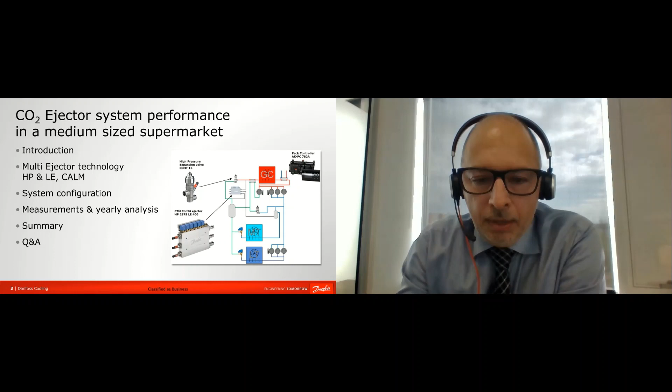Ejector product range, just to get familiar with the expressions we will use. If you look at the top, we have these high pressure lift ejectors with the acronym HP. In the name of these valves, or slash ejectors, there are numbers, and these numbers are actually mass flow in kilograms per hour at certain conditions. You see on the bottom these conditions, and these numbers are actually in the name of the valve. So in that way you can very easily understand for which system size these valves are designed.

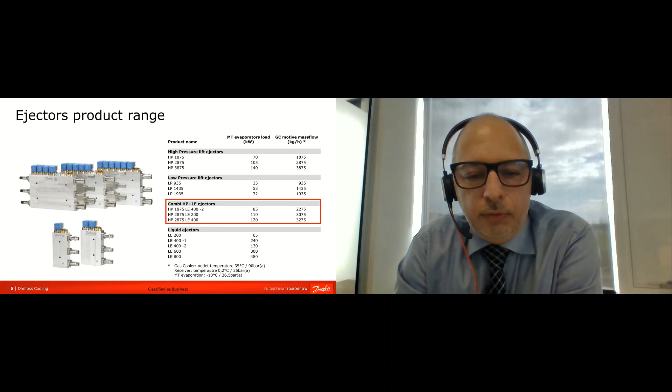Then we have in our portfolio also low pressure lift ejectors. It's also a gas ejector, and it is for another kind of system, which we will not mention later on in this presentation. Then at the bottom we have different kinds of liquid ejectors, different sizes, which are specifically designed to pump liquid. What I marked here in red is this combi, or combination, of HP and liquid ejector. And actually this is today's presentation, focusing on this solution.

What does it mean? If you look at this big block where we put different ejectors inside, different capacities - this one consists of 5 vapor HP ejectors of different capacities, and then at the far right in this picture is the liquid ejector. All of them we are using to control the high pressure in the gas cooler.

Anya, please, can you show colleagues how these blocks look, let's say, in reality, how big they are? Yes, I can.

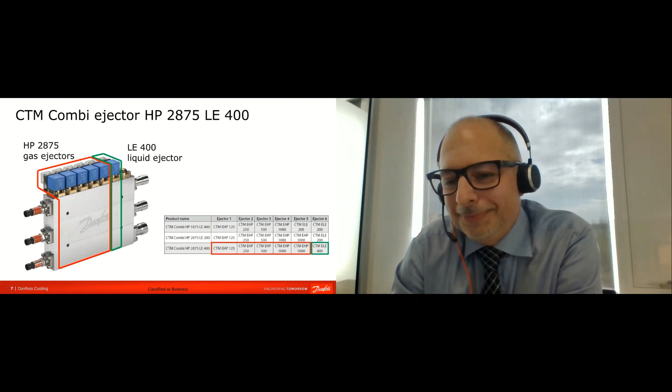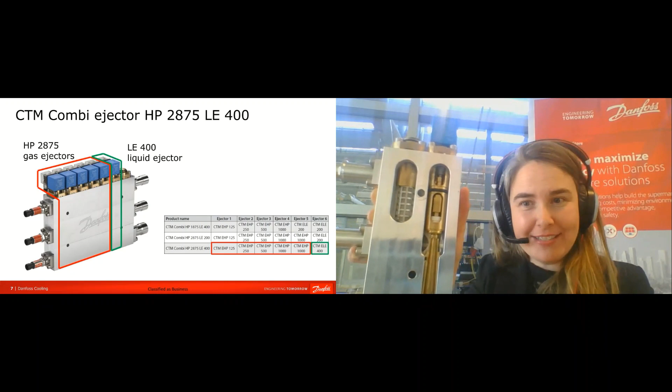So here you can see this is the baby of all our ejectors. This is the smallest one, what we call the CTM 1, because there can only be one ejector in here, as you can see. Here is a cut-through model that we use for exhibitions like this, so here you can actually see the core of the ejector. You see here where the flow comes in through the strainer first, because there's always a strainer in each of our ejector blocks to make sure dirt and other things are kept away from our valves.

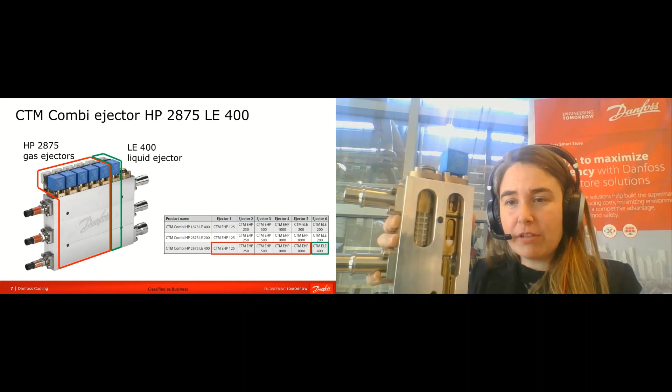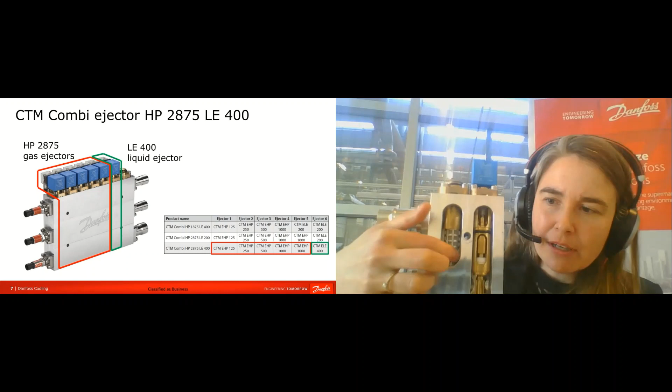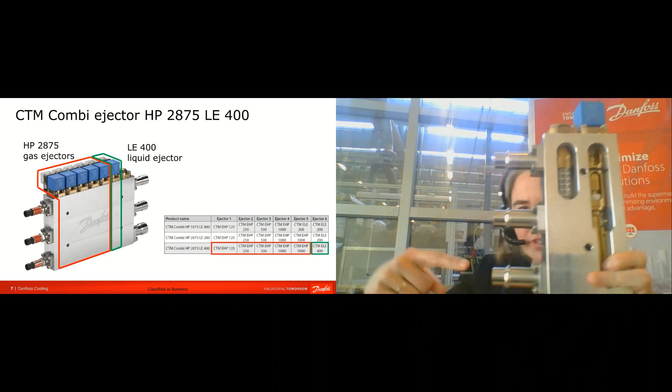Then you can see how it first enters into the top of the ejector here, then goes down into the diffuser chamber. There's a check valve here that is being lifted up, and then at the end it's being pushed out through the diffuser and out into the receiver here through this pipe. So this is the smallest one, where you can get an idea of what actually goes on inside an ejector, but we have an animation that explains that much better.

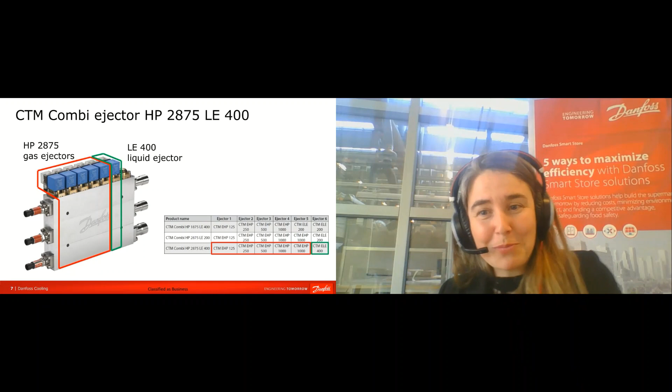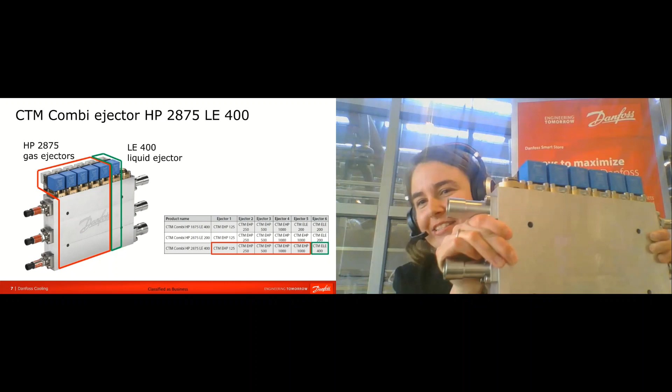Please come to our booth and I can show you that animation, it's much better. But just to give you an idea of what a block actually is - now you have to be ready for this because it's a little heavy. This is actually how an ejector block looks. It weighs 10 kilos, so it's a rather big baby. But this is how our ejector looks. Over to you, Mark. Thank you, Anya.

To explain this combi ejector, I decided to talk about these two different technologies. Then we can combine these two technologies in one block.

First of all, high pressure lift ejector system, or HP in short. What is it? What is it for? It is a solution for medium to large commercial refrigeration systems with parallel compressors. This is very important to understand. This is an add-on or enhancement of the parallel compressor system.

Parallel compressors are often called with different names. It could be intermediate compressor, or auxiliary suction compressor. All of these names actually mean these parallel compressors. In our documentation, we always use the expression IT, or intermediate compressor. Later on you will see a lot of these short acronyms for this suction group.

When we look at this system in cold ambient conditions, the system is actually working like a standard booster system. Why? Because in wintertime we can lower the pressure in the gas cooler, and after the high pressure expansion we will have a not so high amount of gas in the receiver, and the IT compressor will be too big for this mass flow. In that period we use a gas bypass valve to relieve this gas to the suction of the IT compressor. In this operation mode, the system has a very high COP, so there are no major drawbacks.

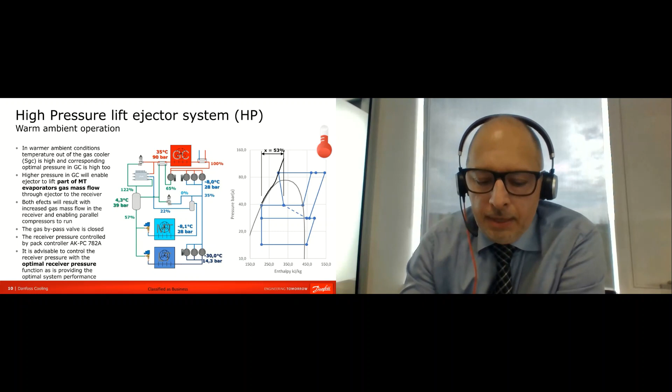From the other side, when we look at the other technology, it is a liquid ejector system. It's a bit different idea, let's say.

The idea here is to use a newly developed algorithm, what we have in our evaporator controllers, to use a different superheat control. What does it mean different? We used for many years, and still using, a superheat algorithm what we call minimum stable superheat.

When we are running this algorithm, we don't have any parts of liquid going out of the evaporator. Shortly, we can say this is a dry expansion system - there is no liquid going out. But with this technology, we wish to go a bit deeper in the evaporator and utilize the surface better for exchanging heat.

So we are using a superheat control algorithm what we call adaptive liquid control. By doing this, we are managing to lift more pressure on MT suction line because we are better utilizing evaporator surface. But as a drawback of this technology, we are getting few drops, or a certain percent of the mass flow, of liquid going out of the evaporators.

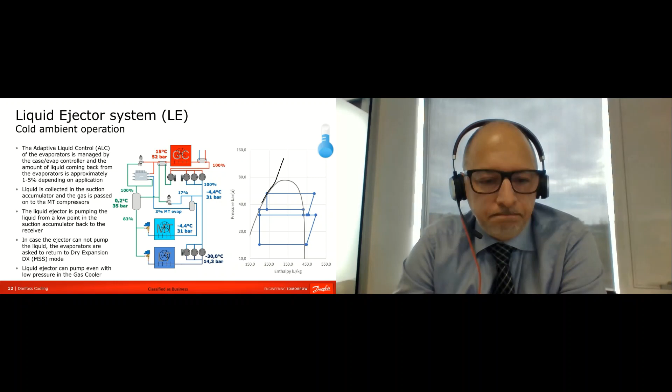So, cold condition, as you can see in this example - and this is an example without utilizing HP ejectors - you see the log pH diagram looks exactly the same as in the standard system, but the pressures are different. The pressure on the MT evaporator is higher than in previous examples. Actually, what we are doing is savings on the MT suction group because the pressure is higher.

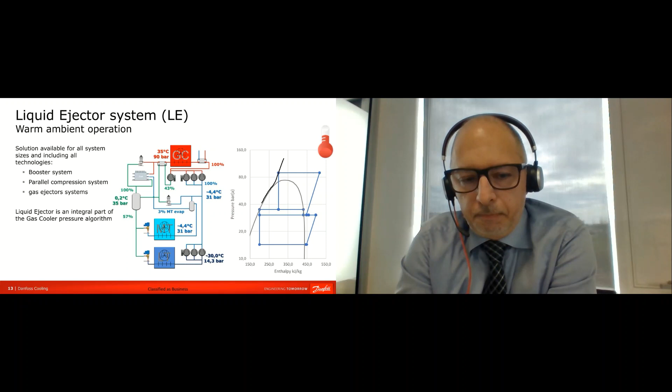What is CALM? CALM is an acronym for CO2 Adaptive Liquid Management, which consists of different technologies. First of all, on the pack controller, we are utilizing a Po optimization feature, which is governed through the system manager, looking at which one is the most loaded evaporator on the MT suction line, MT evaporators. Then based on this worst-case cabinet evaporator, the pressure is lifted up or down in the system, in the pack controller.

The second important part: we are controlling temperature in those evaporators with a modulated thermostat. Controllers have to be those which have a minimum stable superheat control algorithm and also adaptive liquid control. By utilizing these two technologies, only the most loaded evaporators will operate with zero superheat or minimum superheat, depending on the settings.

What is happening if ejectors are not capable of lifting all the liquid which is accumulated in the suction accumulator? The level will rise to a certain point, and in this example, the level switch is between this green and yellow area. This indication of the level will come to the pack controller.

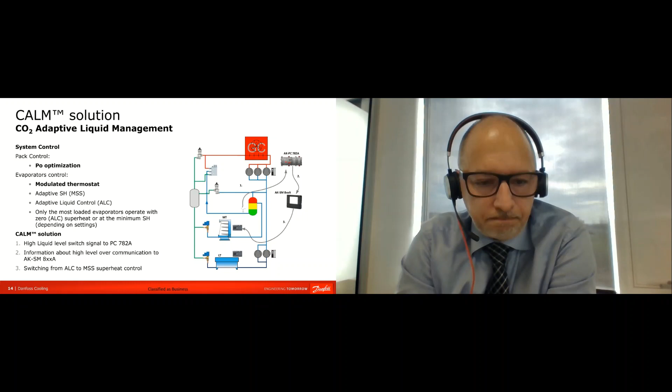The question is, how many evaporators are the most loaded? This is a very typical question I am receiving. If we are talking about a supermarket application where we have multiple evaporators of similar sizes, we are talking about 2 to 5, 6 kilowatts. Then we can say that the ratio between evaporators which are most loaded and those releasing liquid to the suction accumulator...

We can say on this kind of application the average value is always below 30%. Here you can see an example from the case we will present today. It's a two-week period where you can see that very rarely does this ratio of most loaded evaporators go above 30%. As you can see, on average it is somewhere around 20%, but in general we can say 30% to be very sure.

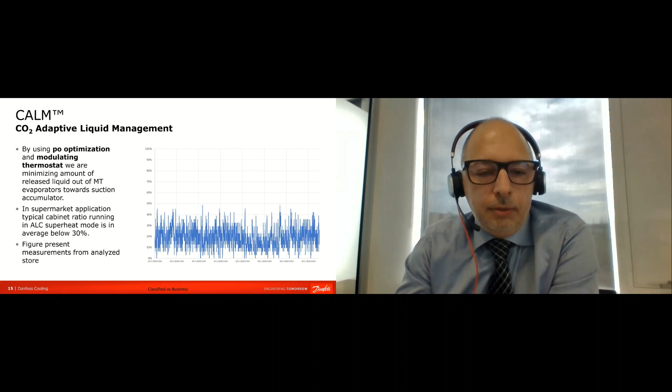So this was a bit more introduction to the technology, to get a better understanding of what we did test on this particular system.

The system is the supermarket chain Edeka Fausten. It is in Germany, so it's positioned in the Central European climate zone.

Startup of the system was done at the end of 2019. We managed to install energy meters during springtime, and you will see when we start recording from this system.

The system is medium size, as you can see, with medium temperature capacity 70 kilowatts, and low temperature capacity evaporators, with refrigeration load of 16 kilowatts.

What is interesting to add, on the gas cooler we have a three-way modulating bypass valve. This allows us to closely control the temperature out of the gas cooler in cold ambient conditions, and also when we are maximizing heat recovery we can completely bypass the gas cooler.

The heat pump evaporator is integrated in the gas cooler, and this brings beneficial operation when we are using heat recovery operation.

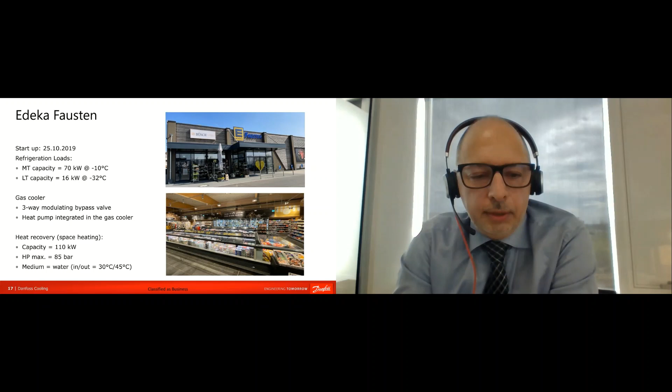How the pack is configured: we have three MT compressors, one of them is a variable speed drive compressor. There is one IT compressor, and all these compressors are the same designation. On each suction group there is one variable speed drive compressor, meaning we have a frequency drive mounted on it.

Then we have, of course, LT compressors. Here we also have three compressors, one of these is variable speed drive. And as you can see here, we have a high pressure expansion valve, a CCMT 16, and the combi ejector.

I mentioned before the logic: we are utilizing, first of all, the ejector as an expansion valve, and then when we don't have enough capacity to match the mass flow coming from the gas cooler, only then we are opening the high pressure expansion valve.

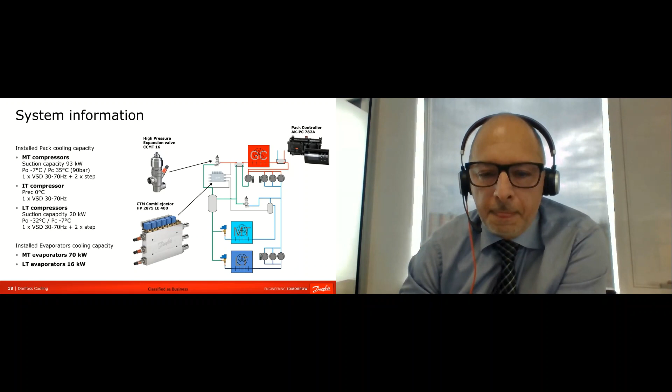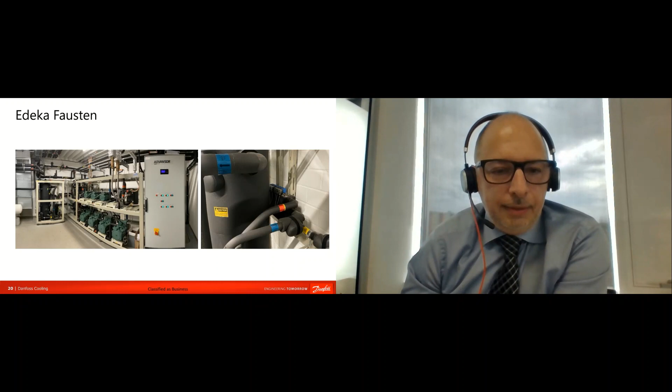You see three LT compressors, and then on the bottom you can see four of the same kind of MT and IT compressors. And measurements.

To emphasize once again, we did analysis for this conference utilizing conditions when we don't have heat recovery. Meaning, you see here two different schemes, all of them from our manuals.

The picture on the left shows system operation without heat recovery, and we are controlling pressure in the gas cooler following this black line in subcritical and transcritical operation. On the right side is actually the algorithm for how we control the system when we have a heat recovery request. What we are doing, first of all, is increasing pressure in the system, and after this first step, we are also increasing the temperature out of the gas cooler, and by doing this we manage to have higher and higher heat recovery for the system.

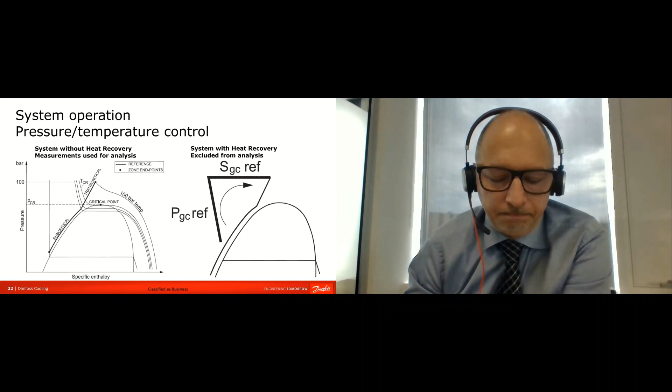As I mentioned, on this plant there is no additional heating source, so the system operation on the right is excluded from today's analysis. This is important to understand.

The second thing we did in the system: always when you are doing this technology comparison, the question is, what is the reference? What is the store reference? Here we have exactly the same store. We are not changing anything else in the system, we are not changing any parameters, only switching technologies on and off. On the left side, you have operation working like a standard IT operation or standard parallel system.

I disabled the adaptive liquid control, as set up in the system, and I also disabled the HP ejectors. So the whole block was disabled, and then the system is working only with the high pressure expansion valve.

You see on the top left corner a green sign for the high pressure expansion valve. On the right side, you see when ALC operation, or the CALM, is turned on, and also the HP ejectors are turned on. You can see next to the high pressure expansion valve, a yellow sign is also on.

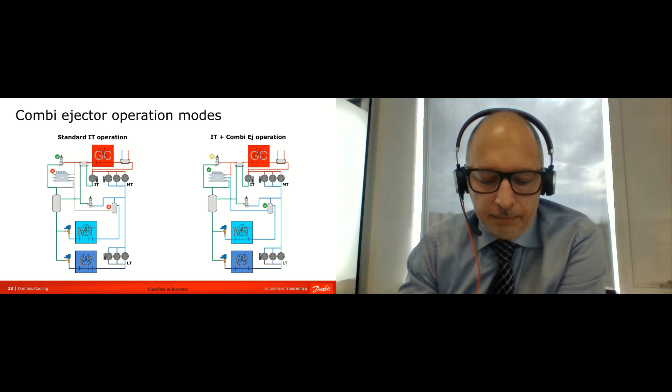What we also noticed is that in this system, when the combi ejector is in operation, it is sufficient to manage all the mass flow coming from the gas cooler. So in practice, this high pressure valve is just waiting in case it needs to open.

Weather measurements. We started measurements at the beginning of July last year, and we have measurements from the nearby meteorological facility, and also an ambient temperature measurement entering the gas cooler. You see that these two temperatures are aligned, with minor differences shown in this gray line, which shows the difference is between 1 to 2.5 degrees Celsius approximately.

The slightly bolded lines are average trend lines for every day, so in that way you can more easily see what is happening in the system.

We changed different operation modes. As you can see, in the summertime we run the system only utilizing HP ejectors, so I switched off CALM. CALM was switched off, and then later, at the beginning of September, we started the system working as a standard IT system, and then at the end of October we started the full system with HP and the CALM or ALC operation.

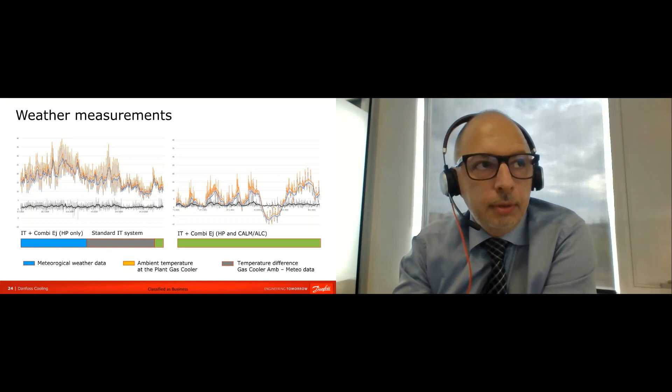Just for your information, at the beginning of March we again switched off the ejectors to see how the system is operating now in these slightly warmer conditions. We are planning to do more tests to have one whole set of operation measurements.

What are the results for the moment? This is a result of operation of the combi ejector, where we can see the evaporation temperature slash pressure. You see on the right side of the diagram this small yellow dot, which is the position where we are measuring this. So you can see that at different ambient conditions, we are achieving a higher pressure ahead of the MT compressor. On average, 2 to 2.5 Kelvins we can manage.

We also notice that when the ambient temperature is higher, the slope of the line goes lower. This is of course logical, because at higher ambient conditions we also have higher temperature in the supermarket area, meaning higher humidity and higher load on the cabinets. So the suction pressure optimization decreases pressure to match desired capacity, but as you can see here, we are still managing this advantage.

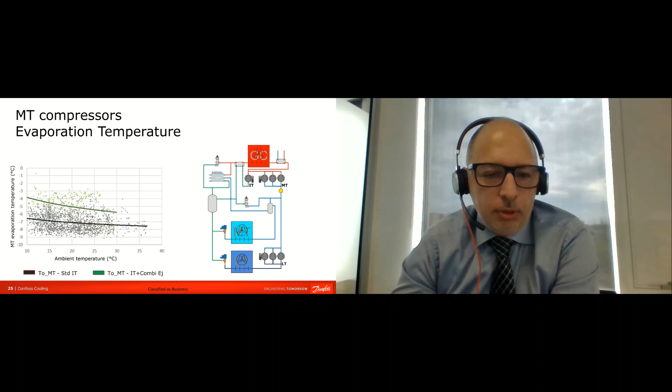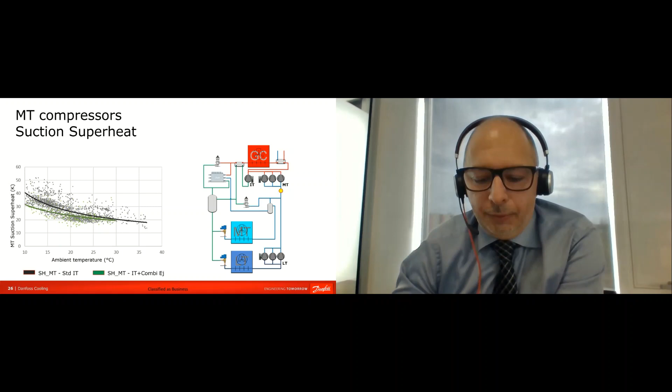Why is this so? Very logical. We increased the suction pressure ahead of the MT compressor, and of course then the discharge line from the LT compressor goes more to the right in the log pH diagram, so the temperature is a bit higher. Once you understand how the system works, this is in the end logical. But this increase, as you can see, is not so drastic.

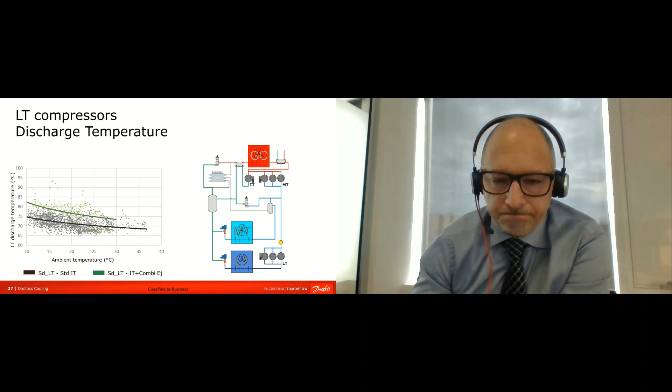What is happening with the medium temperature compressor's discharge temperature? It's because of all these effects, higher evaporation temperature, lower superheat. The result is, of course, that the discharge temperature is also lower. This also brings benefits for the lifetime of the compressor, because every degree higher the discharge temperature is, of course, has influence on the lifetime of any equipment, including compressors. So this is also a plus for the system.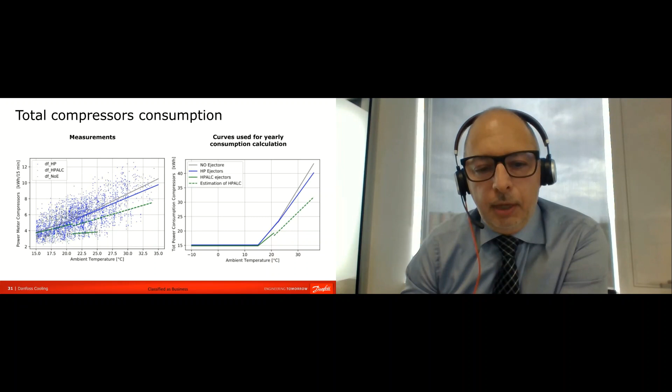What you can see on the right side - the numbers are now showing kilowatt hours, of course, for one hour of operation.

We took weather data for Düsseldorf and counted the number of hours in the year at certain temperatures, so you can see what the climate is in that zone. Notice there are not so many hours above 20 degrees Celsius, so on average it's below 100 hours in the year. But by utilizing the HP ejector, we are entering a bit more into this 17, 16 degrees Celsius range, so we have more hours we can utilize this ejector. It's very important to understand what the climate is in that zone.

We did a yearly analysis for every hour, so that means 8,760 plots, and we summarized per month. Here are results showing savings through the year without heat recovery—this is very important to say. You can see that even in a mild climate, we have these savings. On the right side per month, the green column shows operation with the combi ejector, and the black line shows average monthly temperature. When we took these savings in kilowatt hours and multiplied by the average value per kilowatt hour this supermarket chain is paying, we get yearly savings of roughly around 1,200 euros per year, again without heat recovery utilization.

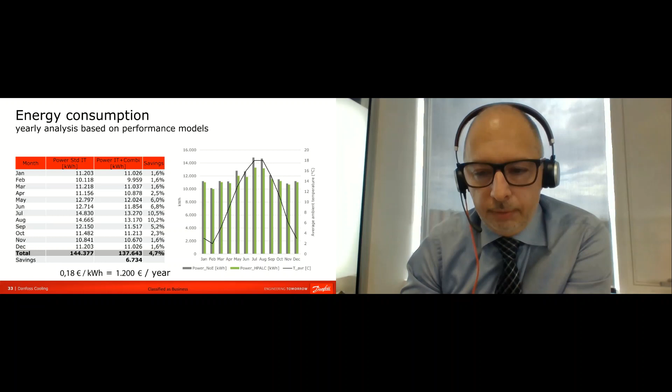As a summary, we can say even in a mild Central Europe climate, we can see additional energy savings using these two technologies, vapor and liquid ejector. We can also say that this combi block, or this combination, is a perfect solution for medium-sized systems. What is very important to note is for the parallel compressors—immediately when you have parallel compressors, you can think about this technology.

Note, I mentioned this a couple of times, this is analysis or results without heat recovery. We are expecting also to have very nice results utilizing these technologies, but of course we have to have a whole winter time operation at different operation modes, and those field study results will be shared later on danfoss.com.

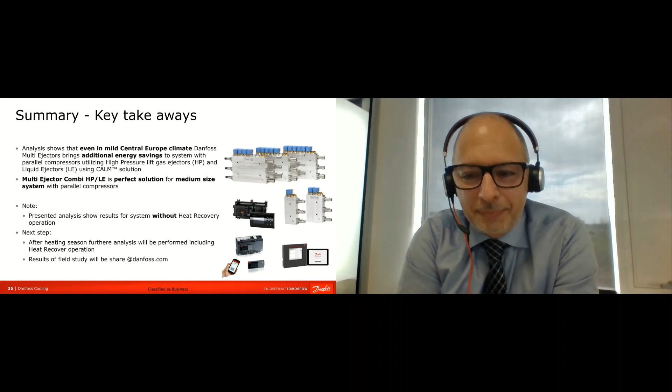The first question: what kind of sensor is used for the ALC, adaptive liquid control, to measure the liquid level? We are not measuring liquid level after the evaporators—we are measuring superheat, using the same temperature sensor and pressure sensor we've used for decades, and only measuring superheat. The liquid level in the suction accumulator can be a level switch from any brand specified for CO2. This level switch will be used in the combi solution to turn off ALC superheat control in the evaporator controller.

Next question is about the heat exchanger. One of our guests noticed that we use an internal heat exchanger in the ejector cycle. What is the influence of the internal heat exchanger on the ejector?

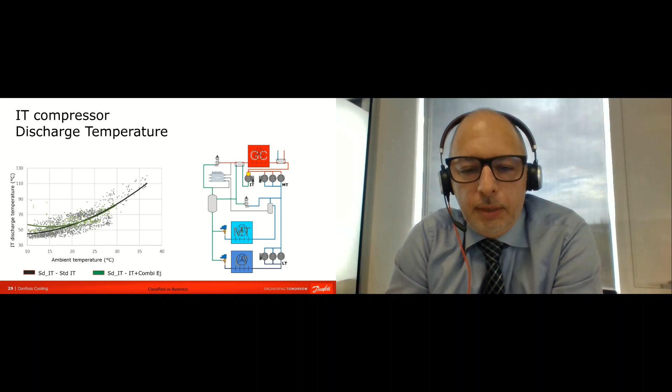If we are talking about the influence on the ejector itself, it means you will have a small additional subcooling from the gas cooler, because you will be subcooling this liquid going from the gas cooler, and of course it will have an influence on ejector operation. Yes, it will have a small influence, but not a big one. Thank you—we have two more questions to go at this point.

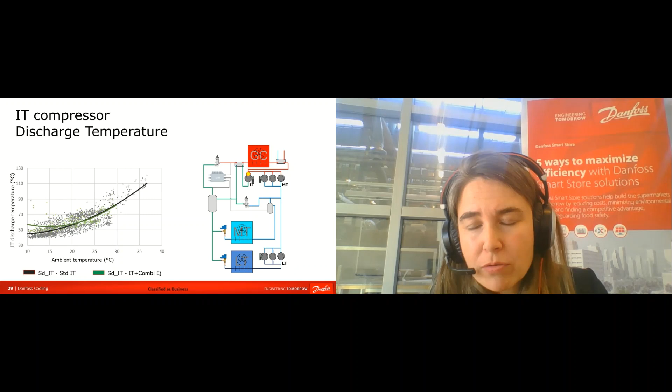I also noticed Portugal doesn't have such extreme temperatures, like 40 degrees Celsius, for example in Spain. I suppose it's more influenced by the Atlantic Ocean, that the climate is a bit influenced by this huge body of water. But absolutely, when we look at this weather profile, Portugal has a lot of hours above 20, or above 17 degrees Celsius, where you could see the huge influence of HP ejector technology.

Yeah, but yeah. More questions coming in, Mark.

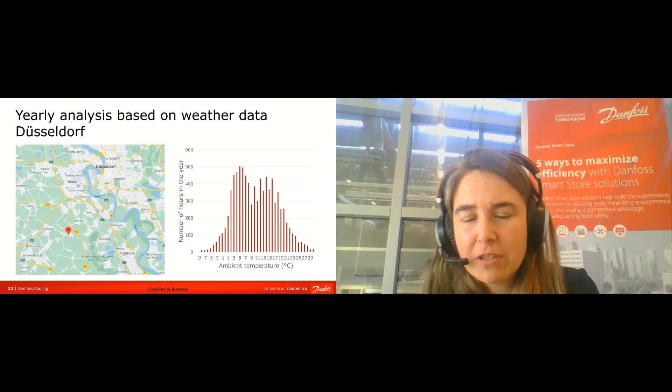Next question: how do you size a parallel compressor for these configurations? Also a very good question.

There are different strategies for how to size a parallel compressor. Personally, there are different philosophies from different OEMs, but my philosophy is to utilize the IT compressor for more hours in the year. There's always a challenge in knowing when you can start your IT compressor, when the minimum speed of your compressor is capable of controlling pressure in the receiver in a stable way.

If you start your parallel compressor too soon, meaning it has too high a capacity for the amount of gas in the receiver, you will notice oscillation in the system because the pressure in the receiver drops, you get into a low load condition, the gas bypass valve starts to operate, and then you switch back to the IT compressor—so you see real oscillations. These reflect from the receiver to the suction and discharge of the compressor. So it's very important to have stable control in the receiver.

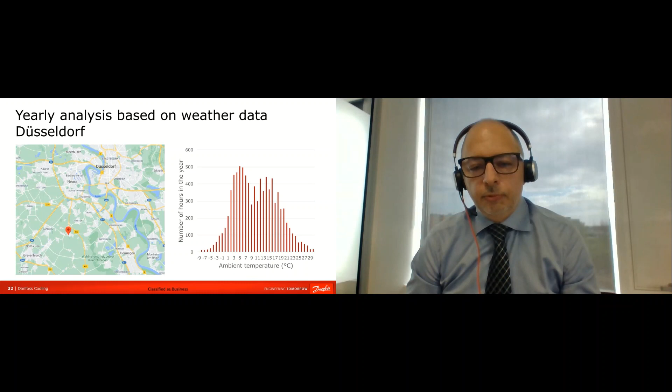What I also found on many installations is that the pack is a bit oversized, meaning you have a lot of redundancy in the system. When you have a big IT compressor designed for extreme summertime conditions, it will rarely work. For example, in this slide, on the right side the number of points and hours in the year is quite limited—we're talking about 100, 200 hours a year. So rather have a smaller IT compressor and more hours in the year to operate and utilize this technology.

Anya? Good, Mark. Good.

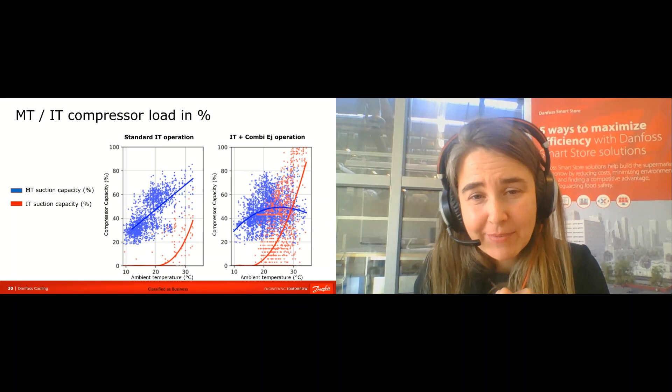Then we have one more question. If anybody out there has more questions, please type it in—we still have 7 minutes to go. But the last question here is actually about something we're not talking about today, so you're free to say no, Mark, but I'll try anyway. This is about heat recovery for heating.

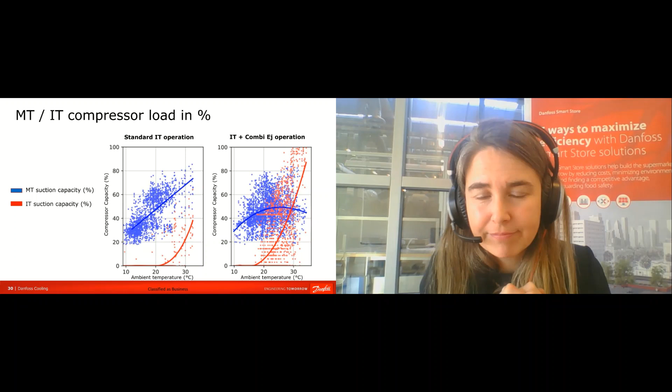If we raise the pressure of the gas cooler, meaning the COP of the refrigeration gas cycle gets lower, is there a point where this becomes less efficient than using a different system for HVAC? Good question too.

For example, on this plant there is no additional heat source, so all technologies are in one. If you look at this system running in heat recovery operation, of course you are losing efficiency if you exclude the heat recovery utilization and just look at the refrigeration system. The COP goes down because you're typically going to 80 bars in the gas cooler, and this is normal operation in summer conditions. But if you look at the whole system, you are always in plus.

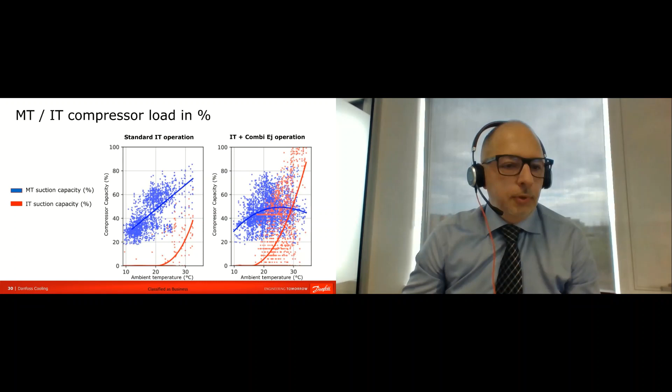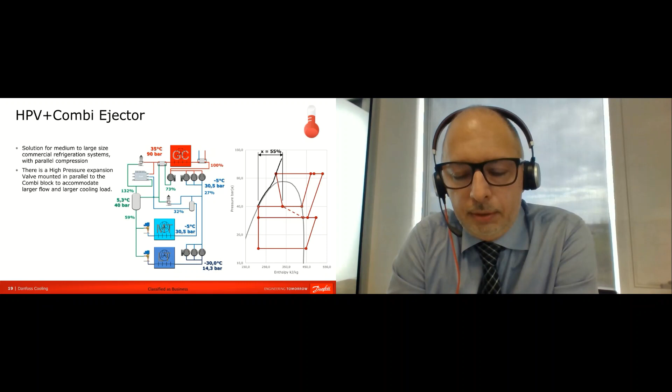It's really a good match to utilize heat recovery in the refrigeration system, particularly on CO2 systems, because we are entering the transcritical area where we can't only utilize the superheating area like in HFC systems, but can utilize the complete area. If you go to the log pH diagram, just a second—we can utilize the whole area on the high pressure side for heat recovery. Because of these transcritical possibilities, CO2 gives a huge advantage with heat recovery.